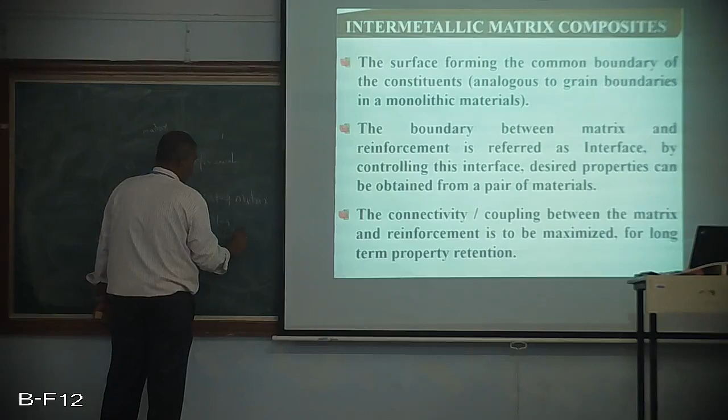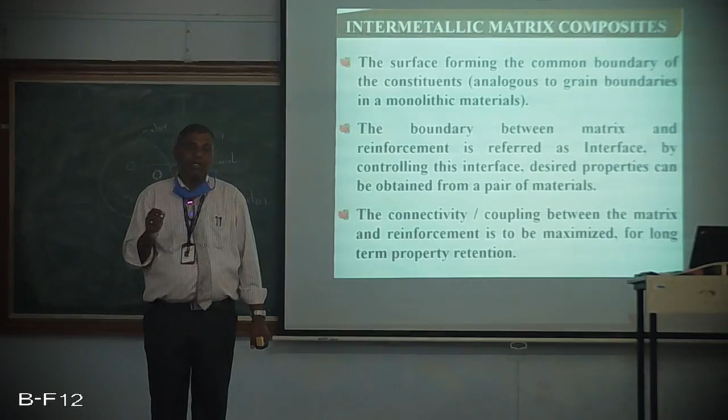Sometimes the third body is called as intermatrix or intermetallic composite. Okay, so this is the third body which holds the matrix and reinforcement together. So because of this, what will happen? The strength of a composite further increases. So that is the advantage of using intermatrix composites or intermetallic composites.

Okay, so you can see these are multiple number of layers. So when you apply the force by using this intermatrix composite, then the bonding will be very good. For example, you can see these benches, how this laminate has been adhered on the plywood or the wood. Just keep the laminate on the wood and apply the force, it will not get attached to the surface. Just put some quantity of adhesive like Fevicol, then apply the force, then it will adhere permanently. So both will become a single structure.

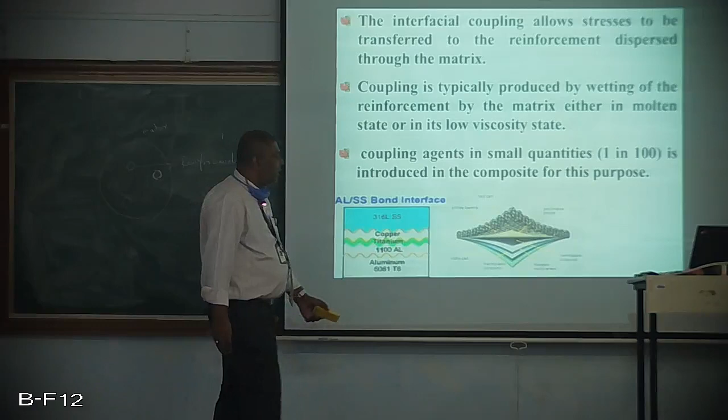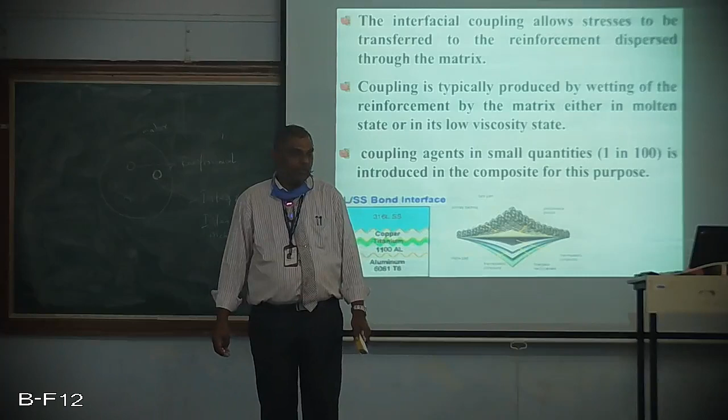So addition of the additives like the adhesives, Fevicol, Fevikwik, gum, all these are called as intermetallic composite. So this is maybe the mats or the fibers or the wooden planks. Okay, so these are adhered. So this is called as intermatrix composites.

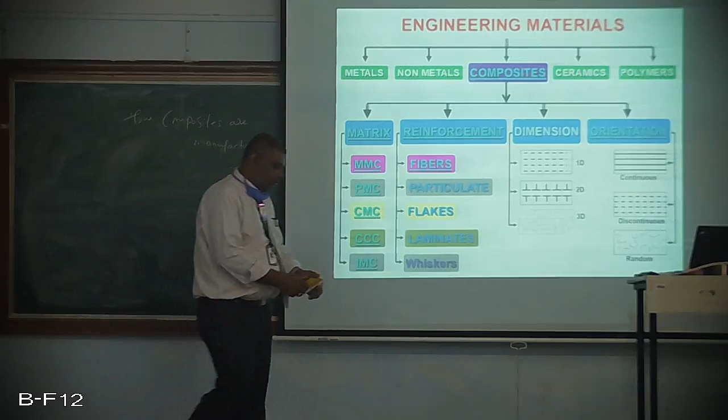Okay, so this ends introduction of the composites. In the coming class, I am going to start with the fabrication of the composites. How composites are manufactured. And yesterday we have discussed the dimension and orientation. If you want more details about this, refer to the previous class, because it will be repetition. So dimension and orientation we have seen in the earlier class.

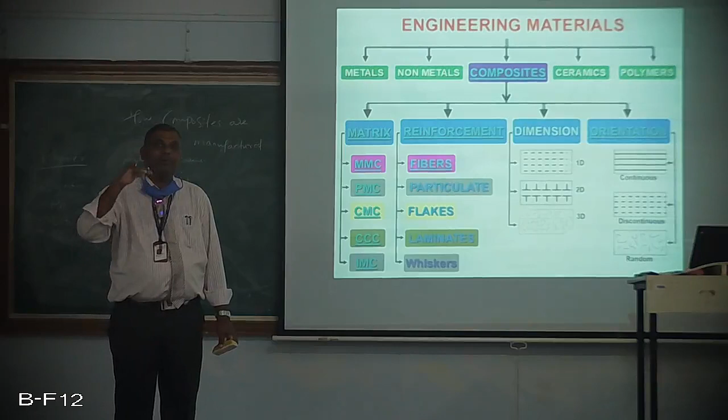For metals and ceramics, furnaces, that is liquid treatment, is used. Liquid treatment means you are going to heat the metal and convert it to the liquid state. That is, heating the metal beyond its melting point and then adding the elements, then cool it, then you are going to get the composite. That is called liquid component.

Then it is solid state processing like the powder metallurgy, followed by the sintering process. Then it is spray deposition process, spray deposition or spray coating process. Then it is vapor deposition process, and so these are some of the processes how the metals and ceramics are manufactured.

I will not go more into polymer processing because the third unit deals completely with polymers. There we are going to study polymers and polymer processing. Now I am going for metals and ceramics. So the first one I'm going to take is liquid metal treatment.

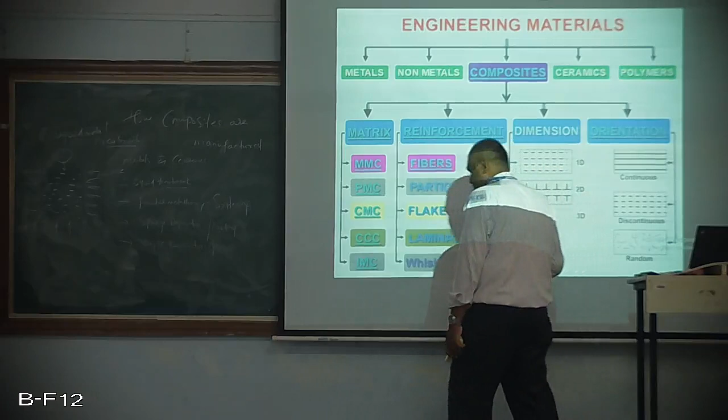When you add the reinforcement into the matrix material, what will happen? This reinforcement gets mixed homogeneously in the matrix material. You can do some stirring operation. By doing the stirring operation, the homogeneity can be maintained such that the dispersion of reinforcement is uniform in the matrix material.

Then you take this out, put it in a die or mold, cool it, and you get the solid. That process is called solidification. After solidification you get the material, which can be used for certain applications directly or after some secondary process. This is called liquid metal treatment or liquid treatment. This is how composites are generated by the liquid treatment process.

This process is similar to the casting process, as you see in the foundries. But the quantity of this composite is not as heavy as in casting in foundries. In foundries the minimum is 500 kgs or tons together; sometimes 2 tons, 5 tons, 10 tons of material is melted simultaneously. Here it is not in terms of tons nor quintals. It is hardly 10 kgs, maximum 50 to 60, or at worst 100 kg is the max. Beyond that, no.

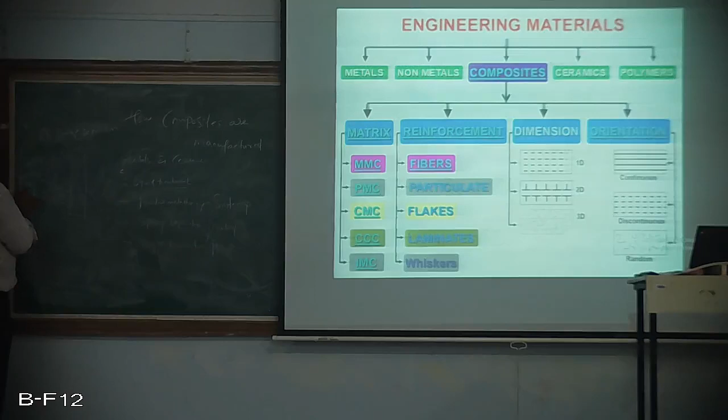So here the particle size is very, very small. Okay, and at the same time this is getting heated. So you can bring matrix and reinforcement both separately, or you can bring a single pipe which has matrix and reinforcement. So you can do both. Bringing both together is better rather than bringing both separately into the nozzle.

So a nozzle is nothing but a divergent nozzle where your high pressure is converted to high velocity. Here velocity will be high and the pressure will be low, whereas here velocity will be low and pressure will be high. So this is the function of this nozzle, which is diffusing in nature. By this you get a certain velocity, and then you get the deposit, the material on the surface. So this is called spray deposition material.

If you want to have fine powders of the composite, or if you want to make bearings, the balls used in bearings are generally done with the help of this spray coating process. Earlier they used to make the spherical balls by forging or by closed die molding. Nowadays they are doing this by the spray deposition process, and the coating done on the surface is also done by the spray deposition process. So these are some of the processes used for ceramics as well as metals.

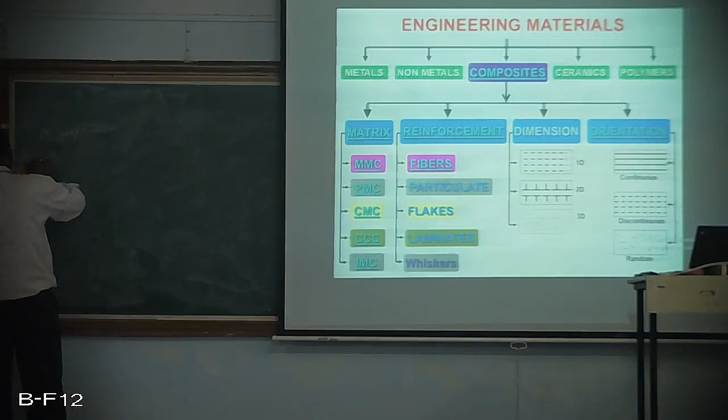And the last one is vapor deposition. Now this is a closed container. In this the metal is there, maybe as liquid metal or solid, and they are going to heat it. Once they heat it, the solid is converted to liquid. If you heat it beyond its melting point, that is superheat, then this liquid metal is converted to vapors. As it converts to vapors, it tries to go upwards because of its lighter density.

While it is in vapor form, it also carries some of the components of this metal or composite. So these composites mix with the vapors and try to go up. Here there is an outlet through the mesh, and here there is a component. So when these vapors come here, they get deposited on the surface. This composite gets deposited on the surface, and this deposition is very fine particles, not in terms of 5mm, 10mm, 20mm thickness.

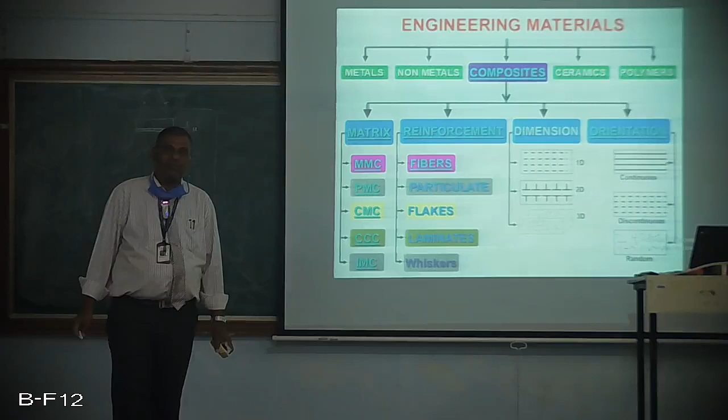So this thickness or coating is in terms of microns, that is 10 to the power of -6, so 5 microns, 10 microns, 20 microns like this. This entire process is carried out in a closed chamber. As a result, you get a very good surface finish of the component. So wherever you want to use filament or reflective materials for space applications, all of these are carried out by the vapor deposition technique.

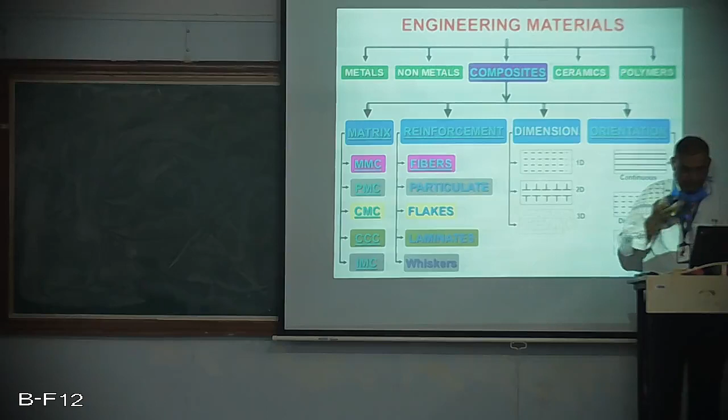Now I am going to tell you about the alignment or orientation of the reinforcement in the matrix. Let us consider these are the fibers and the resin. Resin is nothing but matrix, and fibers is nothing but reinforcement, and both together is composite. Now in the composite, when I am doing the tensile stress, this is the stress and this is the strain. My orientation in the first case, the orientation of the fibers in the matrix is like this.

In the second case, the orientation of the fibers in the matrix is at an angle, assume this is 60 degrees. In the third case, I have the angle as 45 degrees. In this case, I have 30 degrees. And in one more case, I have it like this, that is 0 degrees. So we have 0, 30, 45, 60 and 90 degrees.

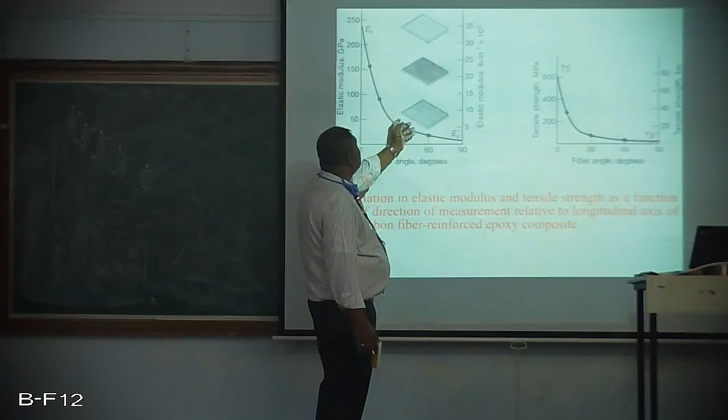So this is the difference between continuous and random dispersion. Now you can see, as there is a difference in the orientation, the strength decreases.